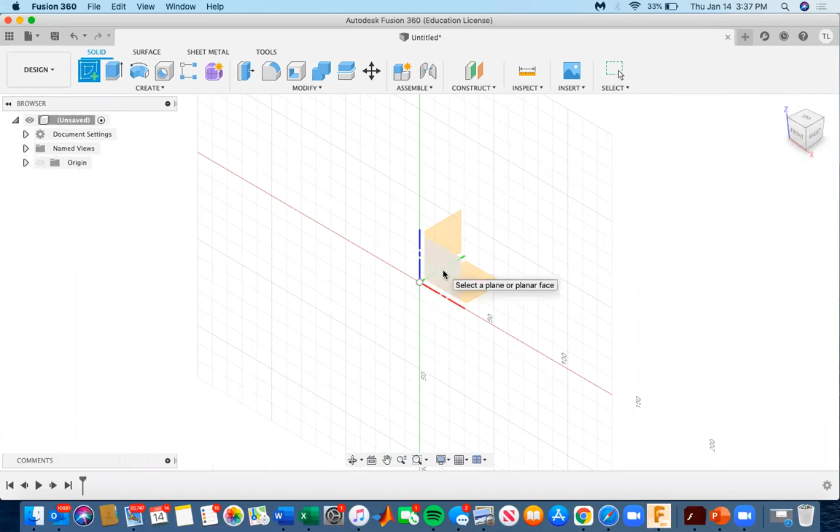So, as you know, this is our home screen in Fusion 360. You have your Create Sketch button right here, I'm going to go ahead and click that, and select a plane that you want to work on. Then it opens up all of your sketching tools right here, so now we have the ability to sketch in 2D, and we're going to do that.

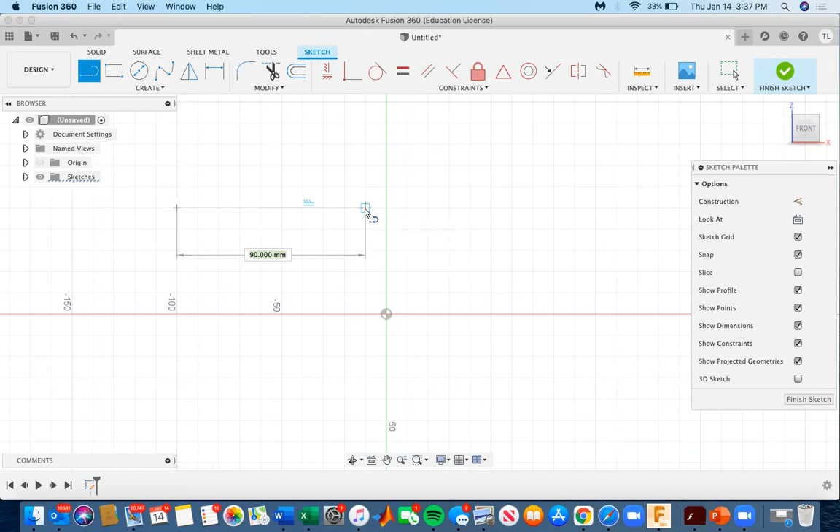The first thing I wanted to remind you of is the line tool. Very, very simple, probably the most simple tool on this program. You just select it, pick a point, and then drag or type in a distance that you want to use. You can keep going and make your own custom shapes, as long as the lines are linear and straight for this object. That's very important. Go ahead and get rid of that.

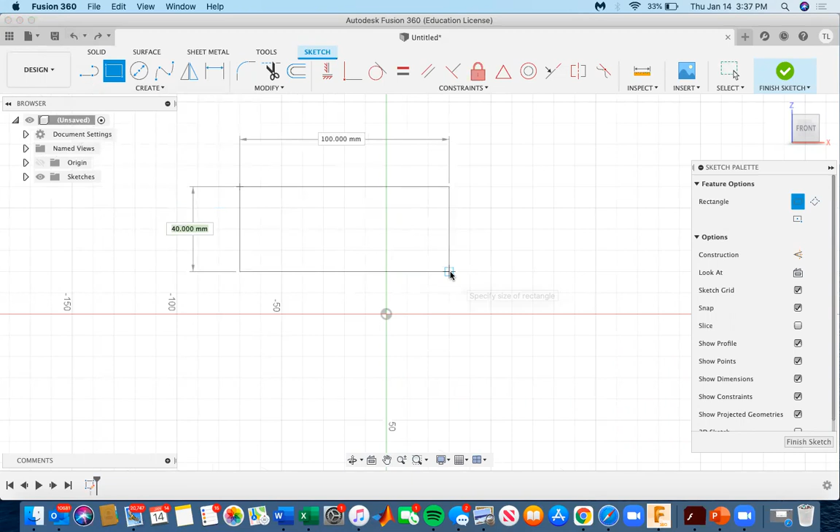The next thing is the 2-point rectangle. Again, very simple. You place where you want your corner to be, you drag it out and click, and there you go, you have a rectangle. That saves you time instead of making 4 lines. It just allows you to do that in 2 clicks, which is much easier.

And then you have your center diameter circle, of course, which is again very straightforward. You just pick a center point, drag outwards, or select a distance that you want, and you have a perfect circle.

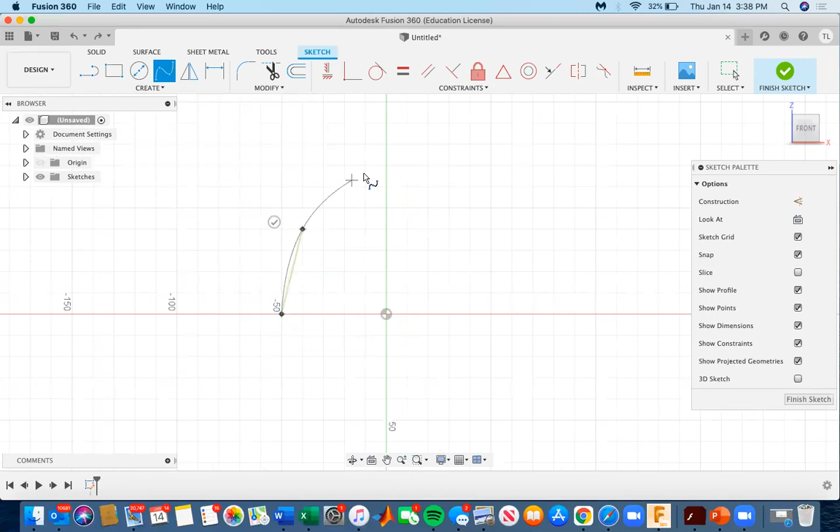So then we did the fit point spline. When we were making the nameplates, that's how we essentially got them to be curved to the right a little bit. For a curved line, instead of 2 points, you need to select 3 points. So I would pick my second point here, and then say I could pick my third point right here. That gives you a nice curved line. You could go ahead and finish the sketch, and it shows you what that would look like from a different angle.

So I'm going to go back to the PowerPoint. Oh, there's one more thing, the mirror tool. This is something that we didn't go over, but it's extremely important. What this does is it allows you to take a sketch and basically mirror it across a line.

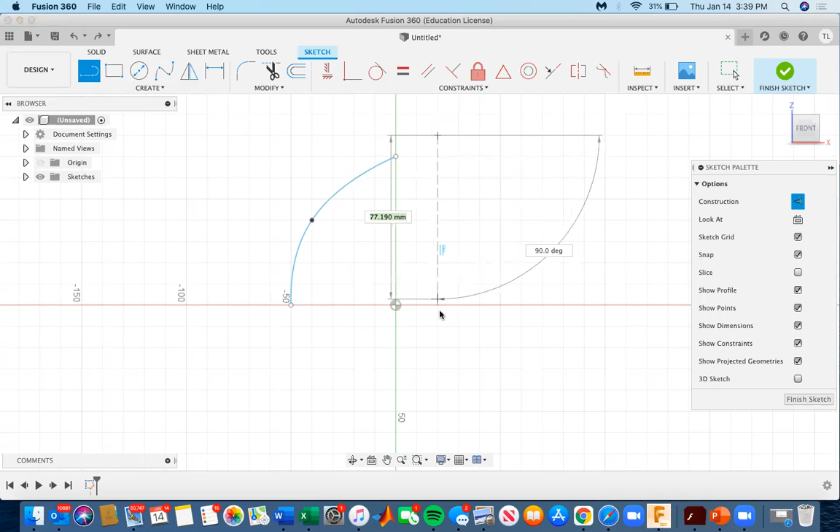There's multiple ways to do this, but I think the most efficient way is to have your initial sketch right here, ready to go. You don't want to create an actual sketch of a line that you're going to rotate it over. The best thing to do is go over here to your sketch palette, click on construction, and this allows you to create a line that's not permanent, I guess you could say. So it's just a line that you're going to use for the construction. Now that we have our construction line, we're going to hit finish sketch.

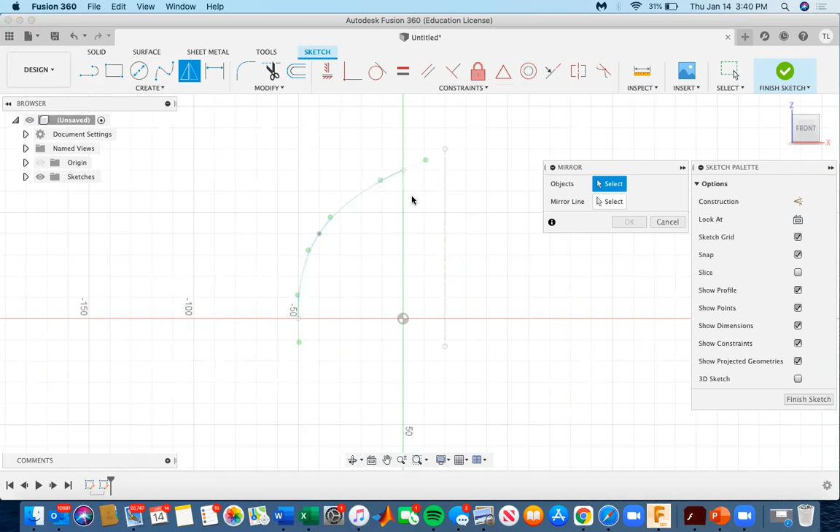And then create sketch on this plane. You're going to hit mirror, select the object. Oh, this might not work. Give me 1 second. Okay, yeah, hold on. This is a good point to learn from. I finished the sketch a little bit too early.

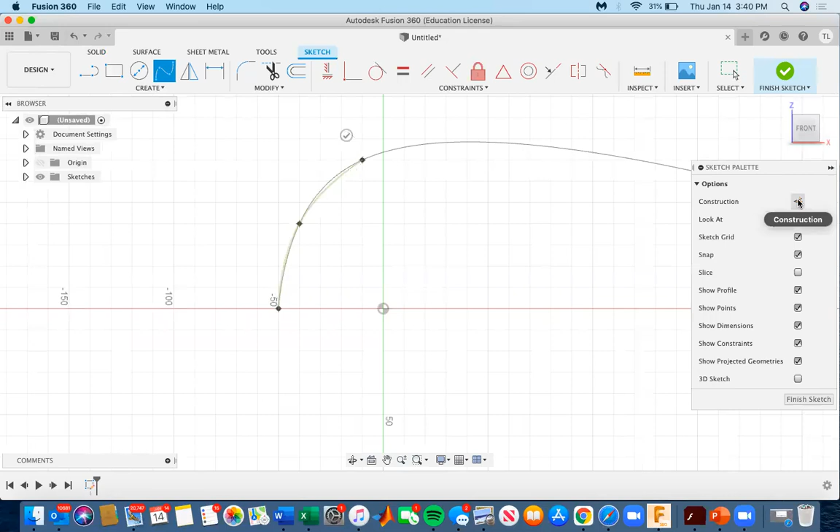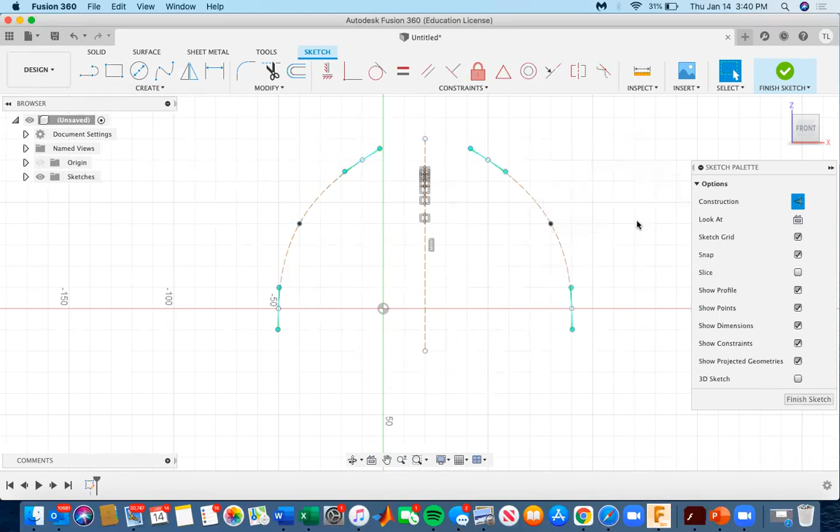So starting over, create sketch, select a plane, and say that we wanted to make this spline again. Then you are going to click on the construction tool, line, and make a line right here. That's the line we're going to rotate it across. Mirror, select your object, select the line that you want to mirror it over, and as you can see, it finished it right here. So I'm going to click on OK, finish sketch, and you have a line that mirrored itself over this axis.

That's super, super useful when you want to repeat certain sketches, and we'll definitely be using this more with the projects and everything we have planned for this semester. So I'm going to go ahead and move on to the next slide.

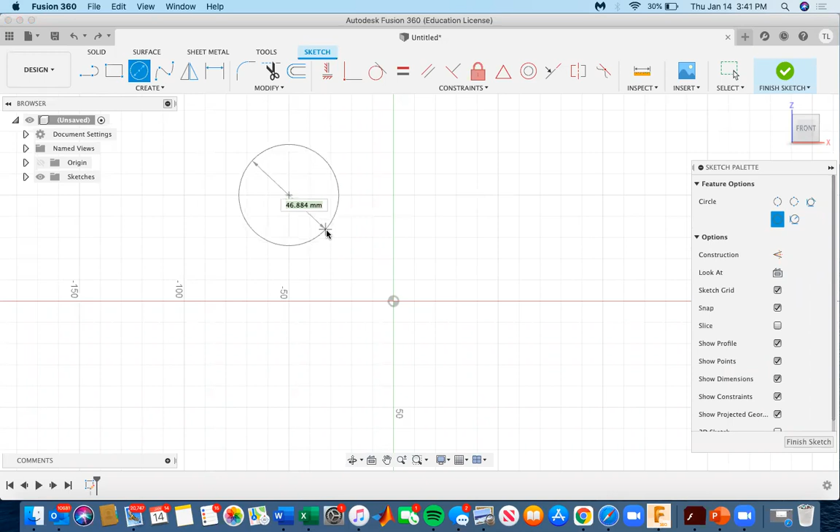Some more important tools, especially when you want to repeat things, are the pattern tools. There are 2 of them that we've learned so far: the rectangular pattern and the circular pattern. I'm guessing that you guys remember this, we used it in a couple of our workshops last semester. So say that you have a circle on a two-dimensional plane right here.

And what you're going to go ahead and do is finish that sketch, press create, pattern, rectangular pattern. This is going to be our object.

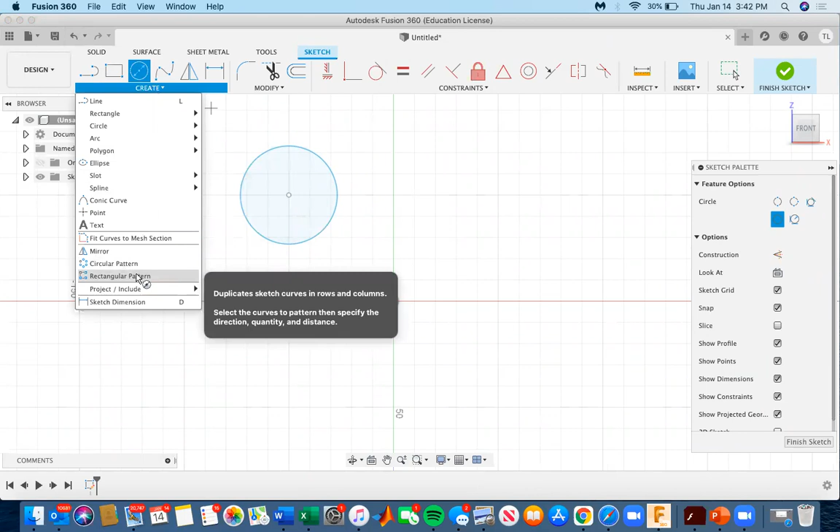Select, yeah. So you are going to create your circle, sketch it, and then go back down to the create menu. Click on rectangular pattern, select this as your object, and then this is the overall distance that you want the pattern to repeat over. So say if I put in 100 millimeters, it's going to take this all the way out to here. And then however many circles I tell it to put within that distance, it's gonna do.

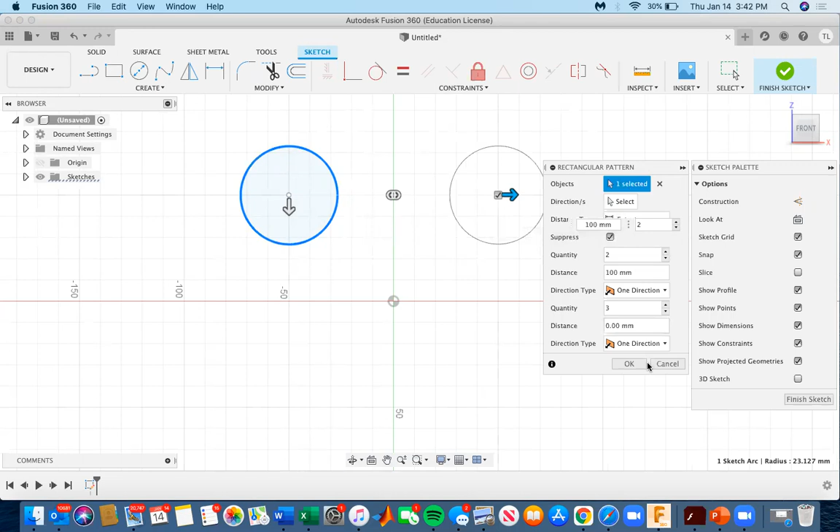So let's try that. 100 millimeters of distance, and then we will do 2 circles. So what it does is it repeats this pattern over a distance of 100 millimeters. So you could go ahead and click OK and let that happen. And with that tool, you could also do this in the XY direction as well.

So the other tool for patterns is the circular tool. So say that you wanted to repeat this circle as many different circles in one overall larger circle.

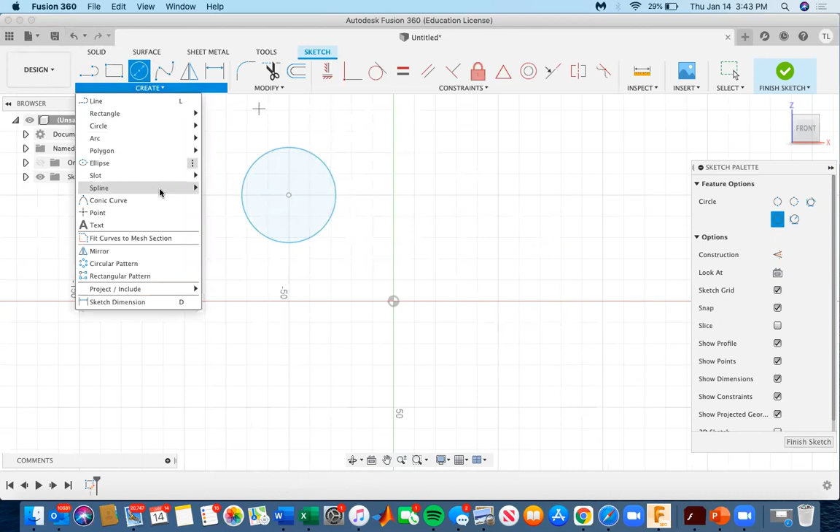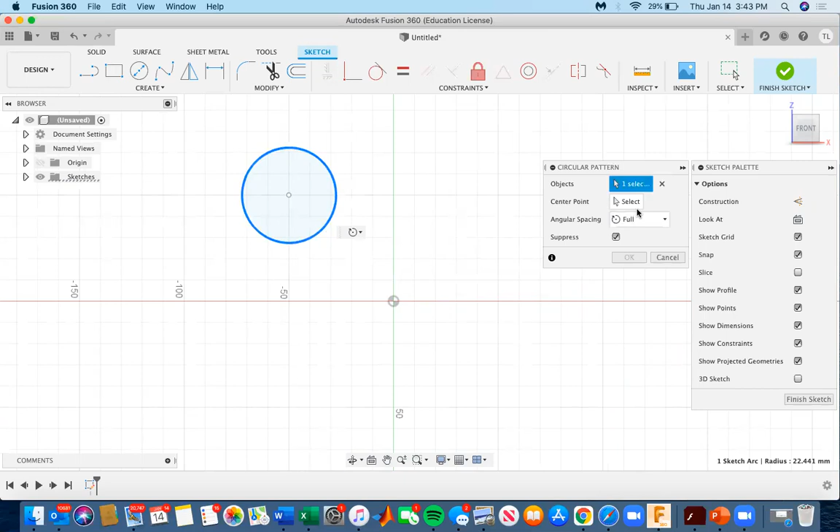So you're going to go to create, circular pattern. This is our object. Center point can be anything, but I'm going to pick the origin. Oh, it says there's 2 selected. So select this, center point is the origin, and then you select your quantity, let's say 15, and there you go. You kind of get that overall circular pattern of one sketch, which is super useful.

So I'm going to go ahead and click on OK, and I'm going to clear the workspace once again. And then the next thing, as we've also seen before, is the revolve tool. So I'm just going to show you why this is such a useful tool, in addition to the extrude tool, to take something from 2 dimensions into 3.

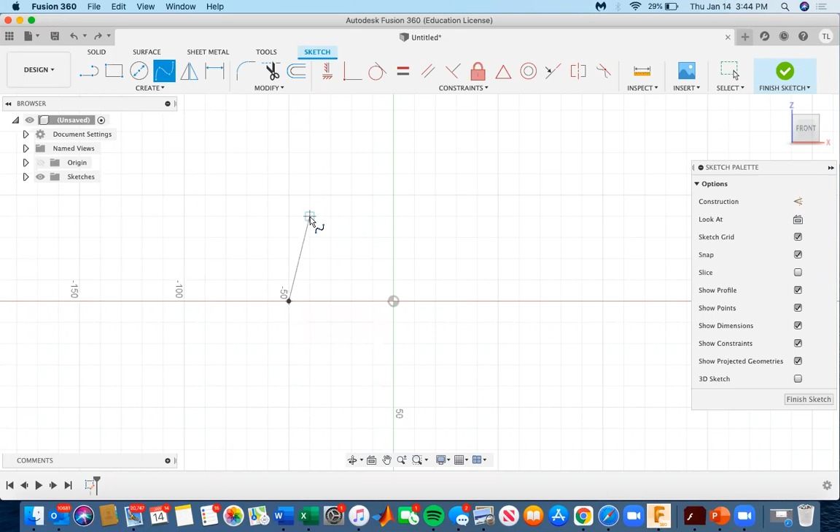So let's create an object like this. So then what we're going to do is we're going to press finish sketch. And you can see all of these new tools pop up. So we're going to use the revolve tool right here.

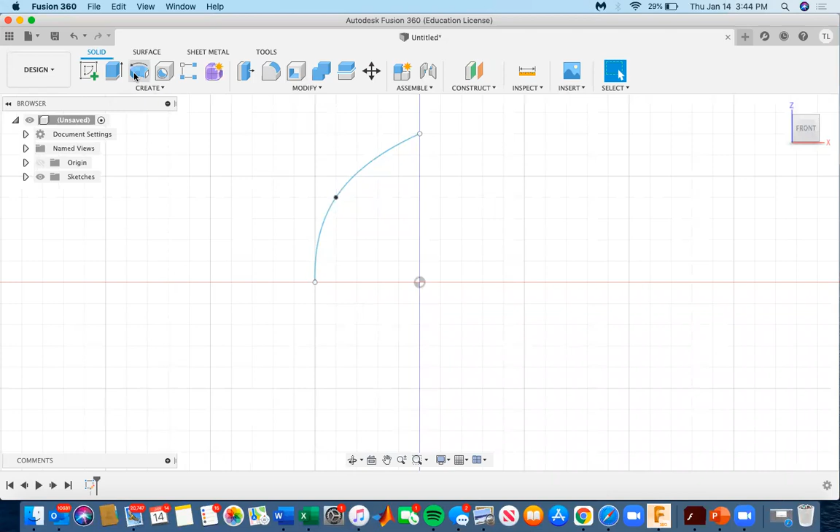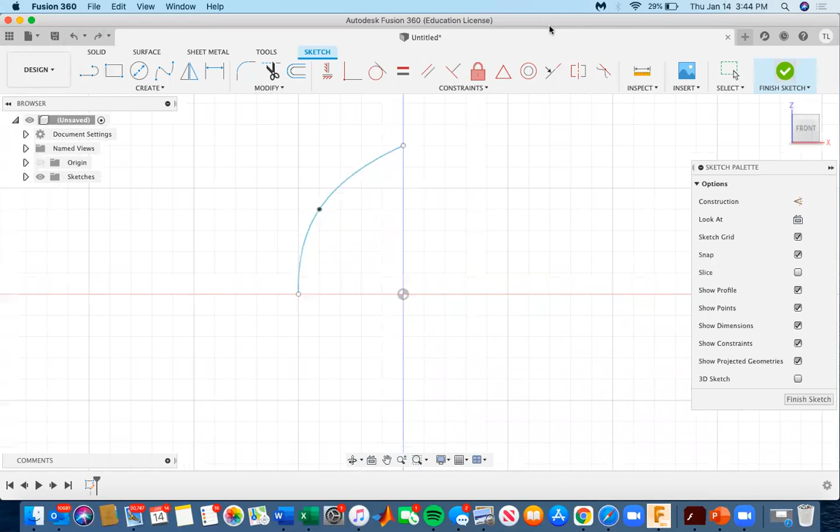Our profile is going to be the line we just created. Just messing up with this. Sorry about that. So create your sketch, and then you are going to finish it, revolve.

For some reason, it will not select this tool. I've been having issues with the revolve tool. I'll try it one more time.

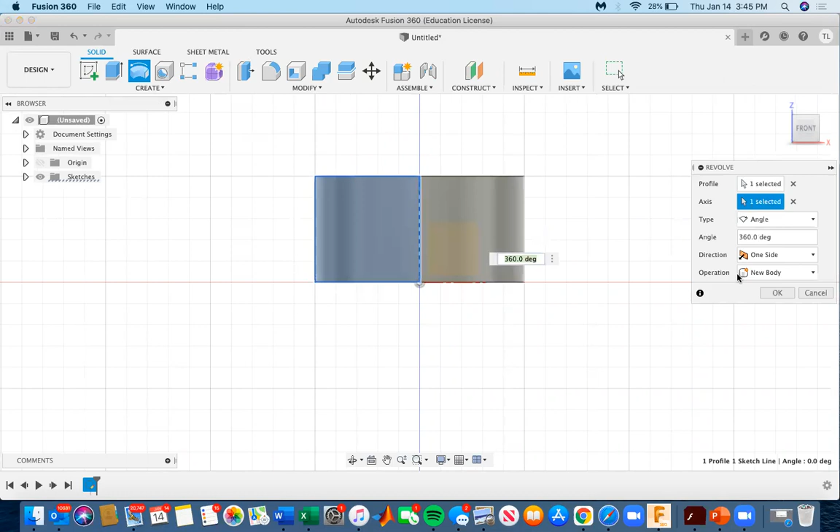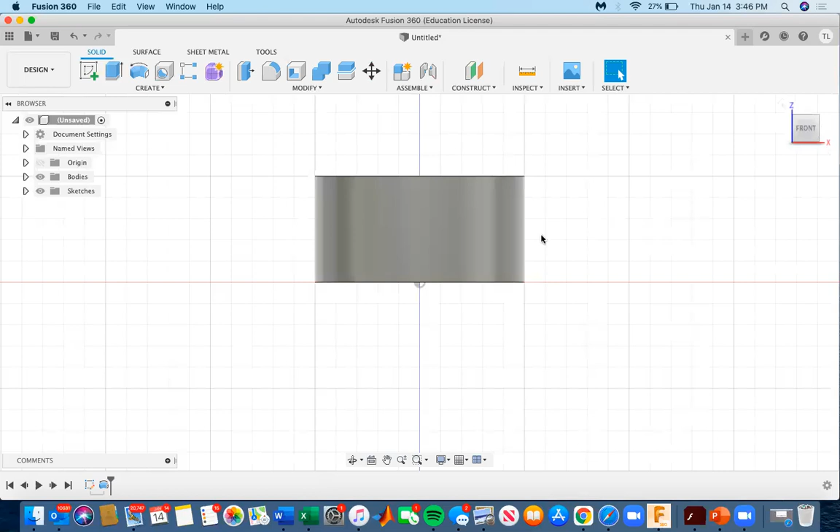Okay, so it looks like it worked there. So what I did is I selected this square as my surface, and then what I did is my axis of rotation I selected as this y-axis right here, and then it rotates it 360 degrees. So what it did there was it took my square and it rotated it, essentially turning it into a cylinder. So that's incredibly useful as well.

And then of course, after that, we have our finalizing tools, which are the extrude, the shell, and the fillet tool. Once again, these are.

Extrude is very useful for going from 2 to 3 dimensions. So I'm going to show you once again how to do that. So as I just did with that, starting with that square, of course, there's many ways to do different things. So now I'm going to do that with a circle, but a different way.

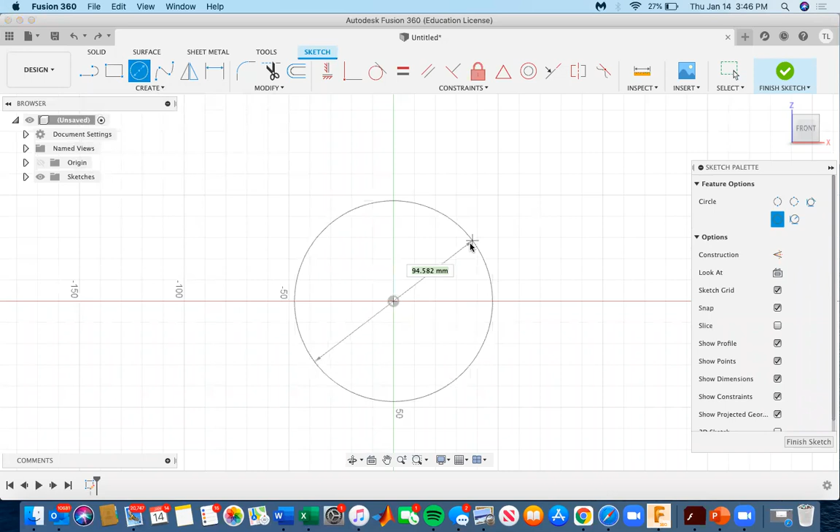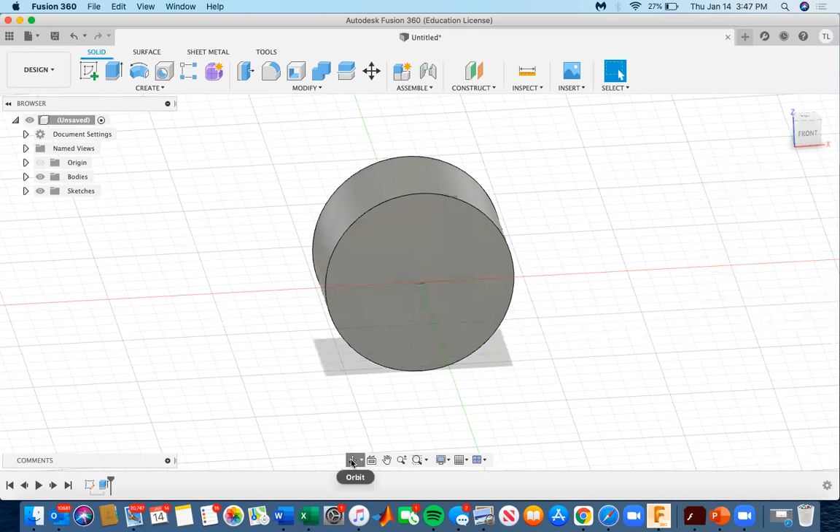Click on that. Go ahead and finish the sketch. Click on extrude. Click on my surface. And then for distance, I'm going to say 45 millimeters, for example. And as you can see, once again, I just created a cylinder, but that was a different way to do it. And both of these tools have their own uses, but that's just one good example of how you can do two different things, or excuse me, how you can do the same thing with two different tools.

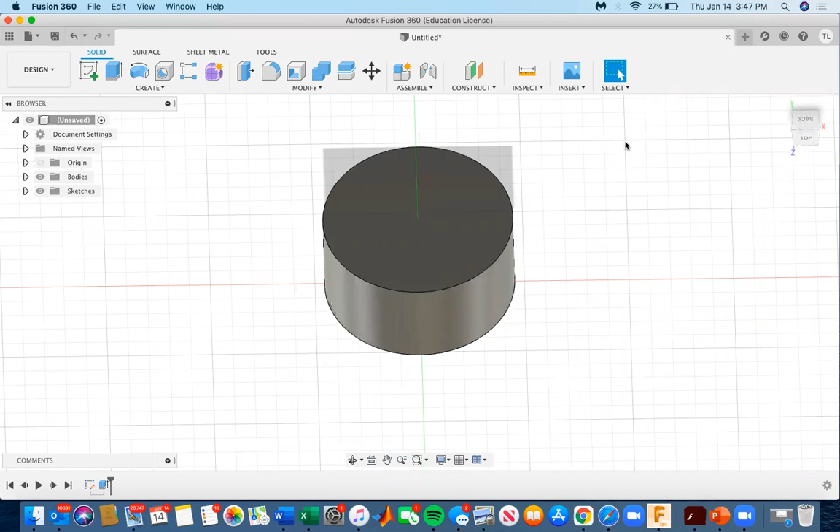Say that this was our final project, but we wanted to make it look a little bit better. So something you can do is use the fillet tool. And you can select as many edges as you want.

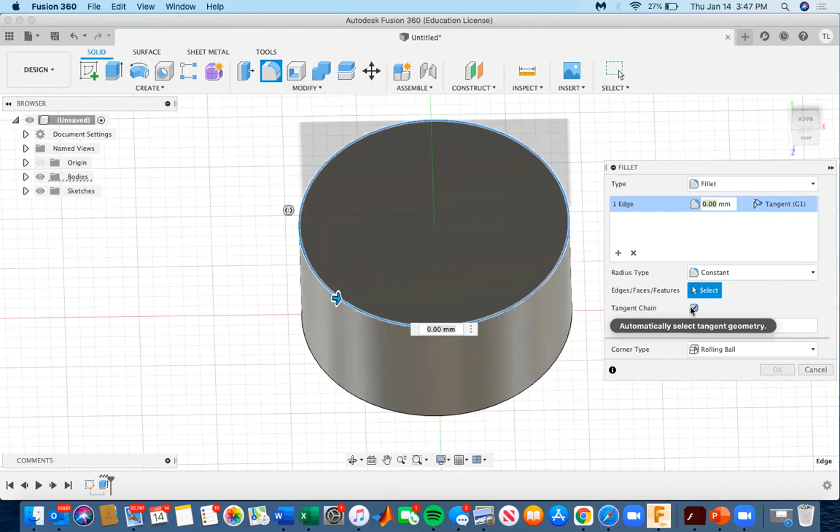So I'm going to select this outer ring of the circle. And I'm going to tell the program to add a fillet of 5 millimeters. So you can see it rounded that edge right there. And that's very useful in things like manufacturing, making things look nice and professional. Usually you don't want sharp edges, so that's a great tool to use.

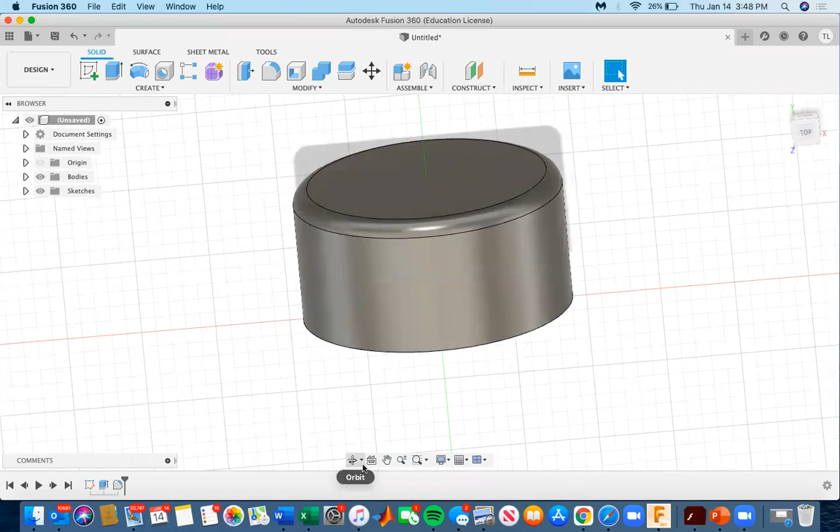And then finally, I'm going to use my view cube to go to the front section.

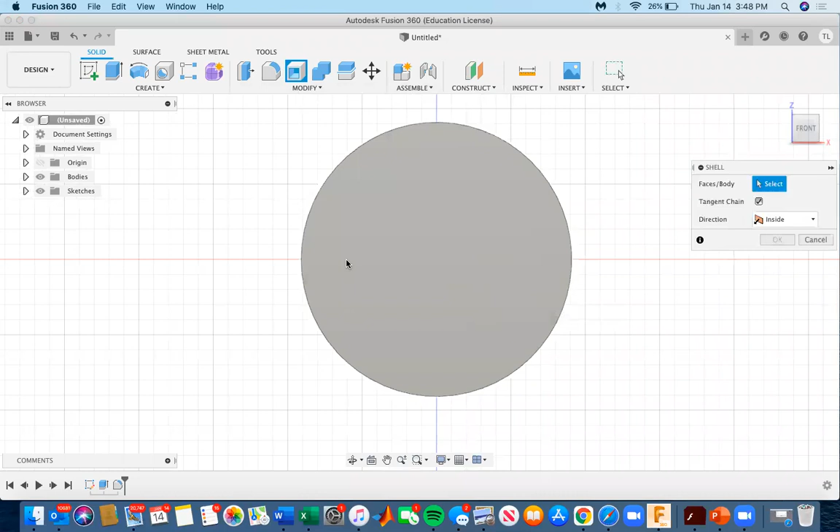I'm going to show you the last modify tool that is very useful for what we're doing in this workshop, which is the shell tool. You're going to select the body or face that you want to shell, which is this one. For inside thickness, let's start with 5, and maybe let's try 7.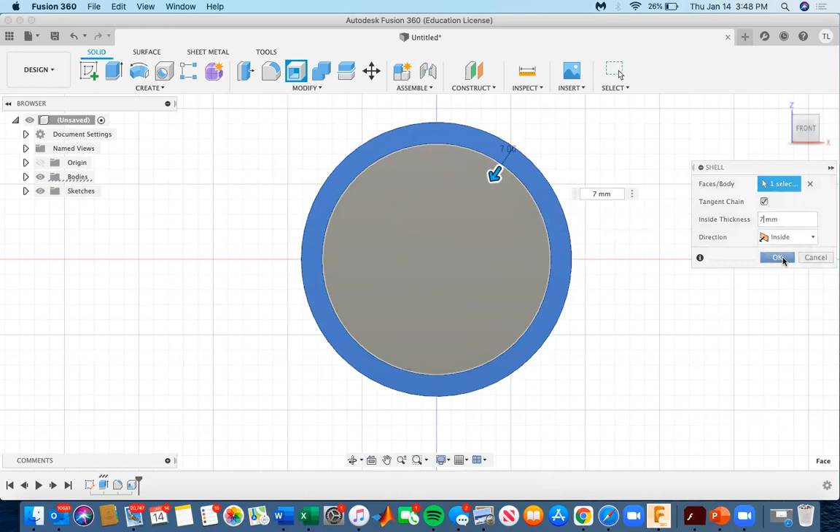Okay, that looks good. For the direction, we set it to be inside, although you could also do outside, where it shells it to come out towards you, but this is usually more useful. So there you go. It made the inside of this feature hollow, which, as you could imagine, is super useful.

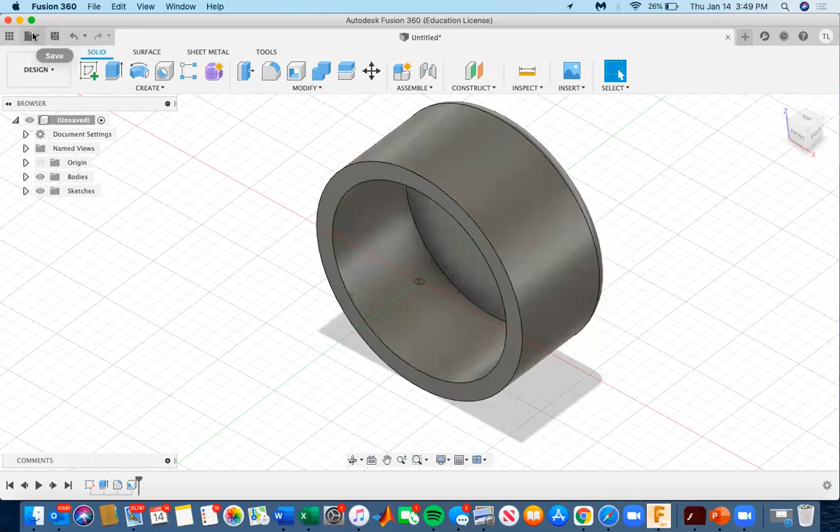That is it for the important tools that I wanted to make sure you knew before we start our projects. The last step when you're in Fusion 360 is saving your work and exporting it. So what we do is save our work up here, and then click File, Export, which allows you to export it to your computer. You always want to make sure you're saving and exporting as a .stl or .obj file, and that's going to make sure things go smoothly in Cura.

So this next part, I'm going to hand it over to Nikki, and she's going to remind you of some of the things that'll help you with your prints in Cura.

Thanks, Alex. So first, like you just said, we will be importing either an STL or an OBJ file. Typically we're going to stick to using STL, but it's okay to use OBJ. You might find some OBJ files on the internet if you're downloading files to print, but primarily we stick to .stl. In Cura, we talked about the different things you can do.

You can move it, you can rotate it, you can scale it, make it bigger, make it smaller. You can make certain aspects of it scale up, or you can snap scale it so it all scales the same way. You can mirror your project, and also you can get a little bit more in depth and adjust the print settings.

So what we were doing during the semester, we were using the basic print settings, the infill, the supports, and everything like that. We didn't really get into the specifics because what Cura comes programmed with for your pre-selected 3D printer, those are good settings to start with, good for beginners. Once you get more experienced, you can go into more complex settings.

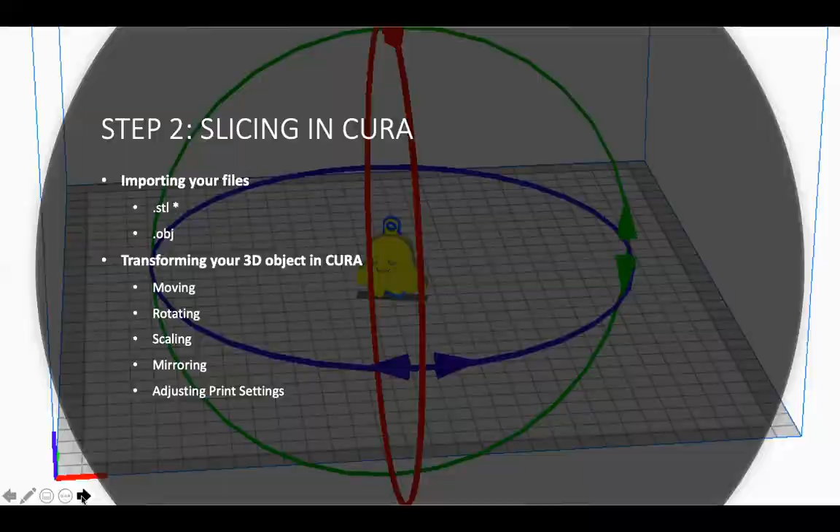So after you've transformed your print however you would like, you slice it. It's everyone's favorite blue button. We love when we get to the point of slicing our print, because it means we're done, we're getting ready to print it.

After you slice, it's going to give you a printing time and show you how much plastic it's going to use in grams. At that point, you'll just click Save to File, which is right in the spot that the slice button was, and you're going to save it as a G-code. There you can pre-select from your computer's menu to save straight onto your SD card, so you don't have to do any dragging and dropping or searching later on.

After you do that, if you save your file to your SD card, you'll take it out of your computer, the little converter you've got it in, and insert it into your printer. Depending on what printer you've got, it could be in the front or the back. In our case, the one we've been using is right in the front, right underneath the bed, on the opposite side of the LED display. So we'll pop that right in there.

Then we will go to our LED display, turn on the printer, and give it a second to power on and warm up. Then we will go to the main menu and scroll down to Print from TF, and that is going to let you access the memory card within the printer.

From there, it'll take you to a menu where you can see all of your projects that you've saved onto your SD card. And you can save multiple. If you really like one print and you think you want to come back and do it again - for example, I did some planters and I wanted multiples of them - I just kept that file on there, and whenever I had some time, I just put another one to print.